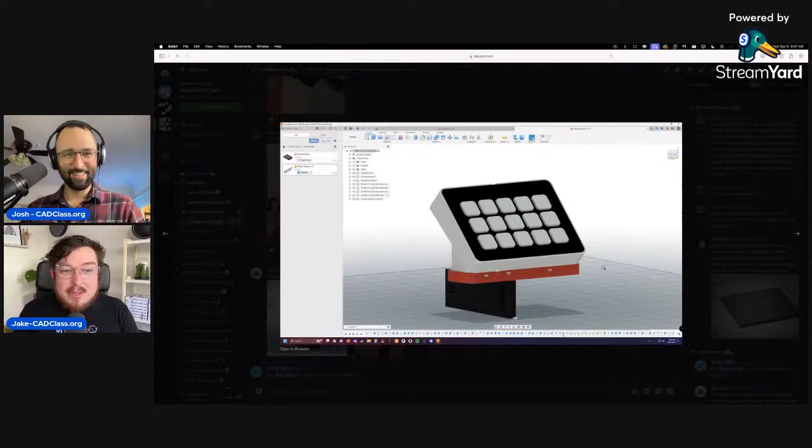Wookie-O, or Wookie Ohio, has made this really kick-ass project - a Stream Deck. That looks like a steering wheel for a game. I have a non-standard wheel stand for my sim racing wheel, and I had to make something to keep my Steam Deck nearby, here's what I did. That is absolutely rad, making this little custom thing. I've seen people use or make these for CAD, where it goes to an Arduino or Raspberry Pi, so you can pre-program buttons and make custom stickers for them.

So like a very specific thing or a complicated series of things that you would normally have to click and drag, and this is just a single button. Like that's awesome. That is so rad. So this is absolutely kick-ass. Love this stuff.

Love it. Love it. I had another conversation with the city of Sacramento yesterday. So we won the innovation grant here in Sacramento. And I was sitting down and she said, "Hey, so what's the desired outcome? What are you measuring? What are the metrics?" And I was like, "Look, I'm going to put it as simply as I can for you. People who go through our program, they can do as much or as little as they want, but the moment they start making things that they're genuinely excited to make, and it's not our stuff, but it's stuff for them, that's a win. That's it."

Yeah. That's all I want. If they leave 100% excited to make their own stuff, that is the goal of the program." And she was like, "Oh, yeah. So what about the metrics?" And I'm like, "That is the metric. That's a win."

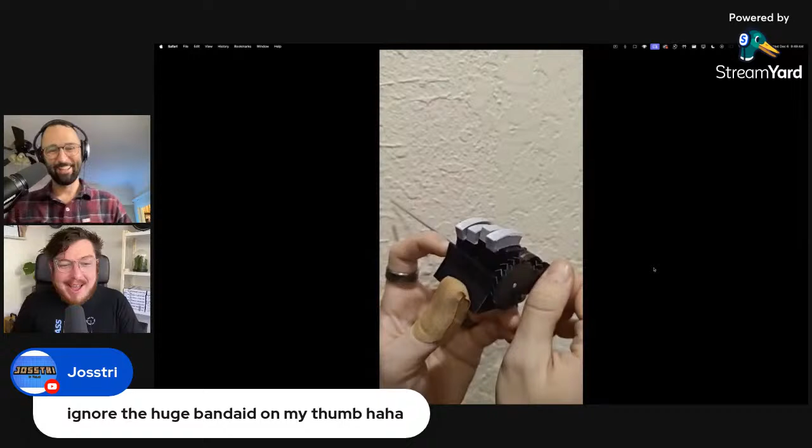And that's Josstri. So he's in the chat. So if you've got questions for him, by the way, he's there. Josstri, yeah, I still need to pick your brain. He said, ignore the Band-Aid. Yeah, I'm not going to ignore that Band-Aid because that is the mark of somebody that's making things. I don't know of many makers who aren't just full of Band-Aids and splinters.

Yeah. And I have a tiny story. So my fiance is a nursing major, but when she was in high school, she was the person at football games, the medical staff that ran over and helped you off, wrapped your ankle, all that kind of stuff. So her entire life she's been very tuned into, I need to help people. Oh, you cut yourself, broke a bone, I'm here to help. And anytime that I was doing woodworking or metalworking or welding, and I would cut open my hand, slash open a finger, my initial reaction is, oh, just squeeze it and squirt some super glue on it and hold it for a few seconds, then it's fine, it's done.

Because super glue is hygienic. And she had never heard of this before. Uh-huh. They use it in emergency rooms, by the way. Yeah. But I learned that from my grandpa in his workshop. And she was like, what kind of backstreet alley medical aid is that? And I'm like, looks fine. She's like, no, it doesn't. PC Van Vliet says, thought it was to prevent you from sucking your thumb. Boom. I don't know. It works fine. It works just fine. But anyway.

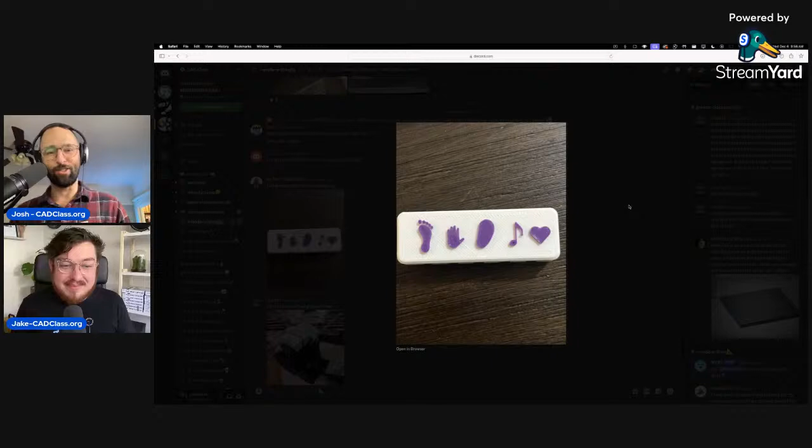We went through the process of, I think there was like a friends don't let friends try to modify STLs rant, maybe PC Van Vliet. I don't remember who it was, or maybe it was Maple Leaf Makers. I don't remember who, but we went through the process of importing that, starting to kind of edit some of the STL, and just saying, actually, the way we do this is just to redo it. Yep, it sucks, but that's usually how it goes.

Fantastic. So it looks like he did it. That's amazing, by the way. I mean, Maple Leaf Makers is there. So I think he's only completed maybe week 0 of what we have in the book so far, and he's already making his own custom stuff. So you guys who haven't yet done any of that, you can do it.

Also, shout out to Fancy Frog. What a name. Fancy Frog. I love it. Cool. Absolutely rad.

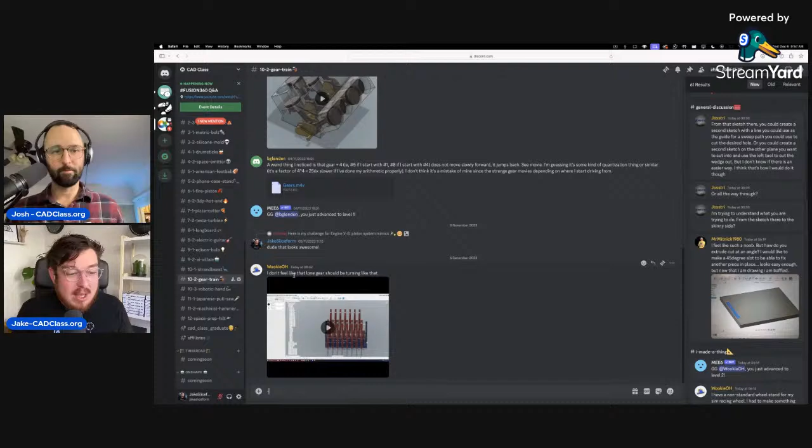A really quick question in the gear train, which is much later in the course. So the whole point of the gear train project, if you guys haven't gotten to it, is that you essentially make this massive gear reduction system where if you put in enough speed for the first gear right here with just a normal hobby motor, it reduces that slowly but surely until the very last gear will take a year to make a full revolution. And it's in this kind of tight package.

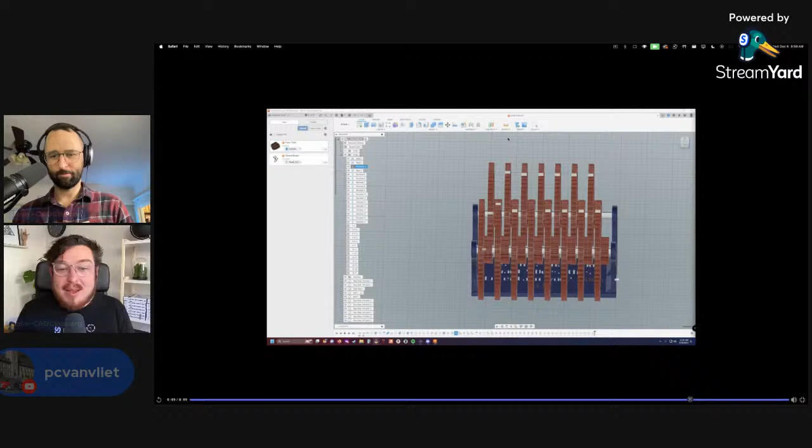But there's like 17 joints you have to do exactly in order and exactly motion link all of them. It's a massive pain. We'll be keeping the project, but remixing it to make everyone's life just a little bit nicer. Just simpler. If you want to expand it, you can. Yeah. So we'll just be messing around with this a little bit, because there are some really fun bits of physics in here, which I kind of dig. There's a little bit of math in there, which I like, but not everyone does.

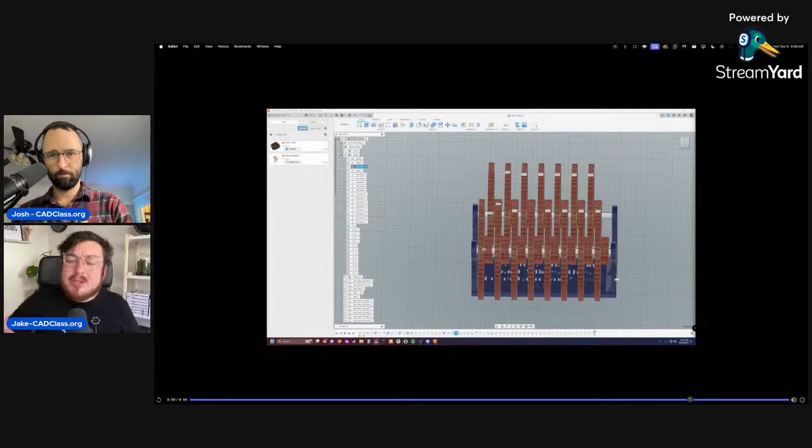But this person's problem, not sure who it is. So as you can see, when they apply an animation to the first gear, it looks like everything's turning fine, but this last gear is kind of funky. This is mirroring the motion of the first one. So I think they just accidentally added on a motion link between this gear and the first one, potentially, and set it to a 1-to-1. So when you turn the first gear at a set speed, the other one is going at the exact same speed. It's a 1-to-1 ratio.

But for all the other ones, if you guys can see, this one is a 1-to-4. So when this first one turns 1 revolution per second, this one's turning a quarter. That one's a 16. What is it? 1-to-64. And then it just goes on and on, reducing until this last one will look like it's absolutely not moving at all.

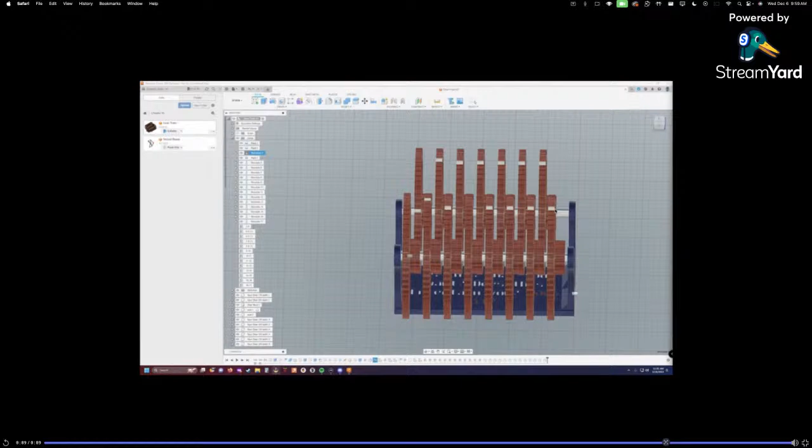I actually do have a little motor, teeny tiny little hobby motor. Nice. That I've been meaning to 3D print this and actually make it. Yeah, I have the files. I just need to make it. But that's a mini project coming down the way in a little bit.

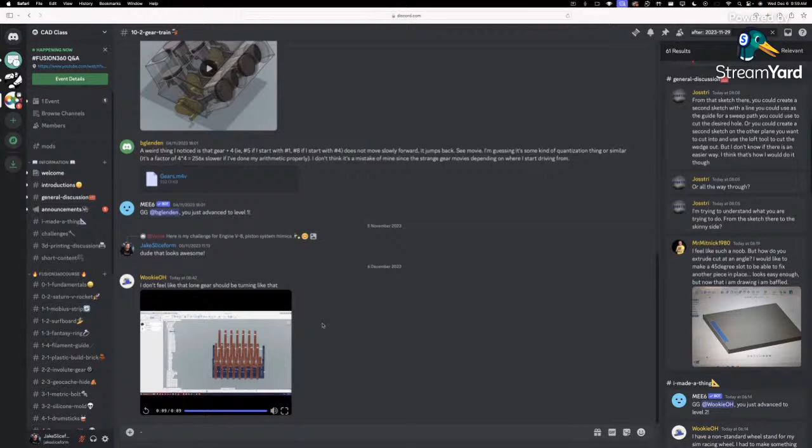We got to meet him at Open Sauce in San Francisco and interview him. Yeah. Such a nice guy. He was super nice. Rad. Yeah. I love his stuff. He's an artist. And I just envy his work. I agree with you. Yep, he's amazing.

We had a really funky question from Mr. Mitnick, which I think he's in the PC Van Vliet. Is Mr. Mitnick? They are one and the same. Gotcha. So he says, I feel like a noob, but how do you extrude cut at an angle? I would like to make a 45-degree slot to be able to fix another piece in place. This looks easy, but now that I'm drawing it, I am baffled.

So what I think is that you essentially want this top surface to be square, but then actually like a 45-degree angle V cut into it.

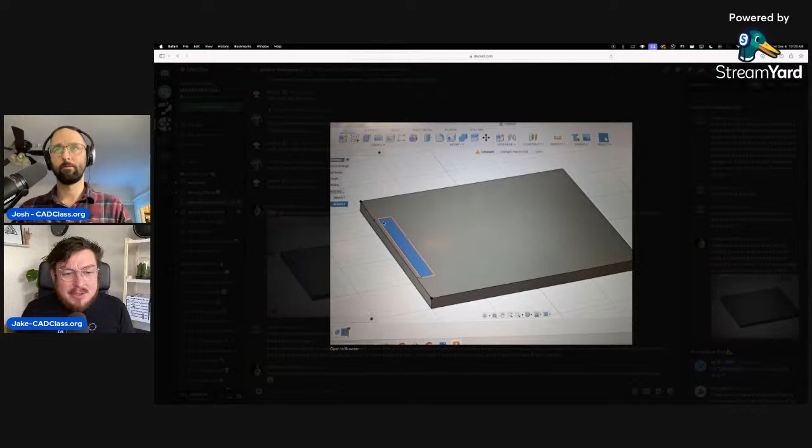There's a couple different ways to do it. It looks like you made a sketch for the rectangle, extruded it, and then made another square here. I would do it in a slightly different way, and I'll just do it very, very quickly if you don't mind. So my initial reaction is to make a box. I'll just make it roughly the right size.

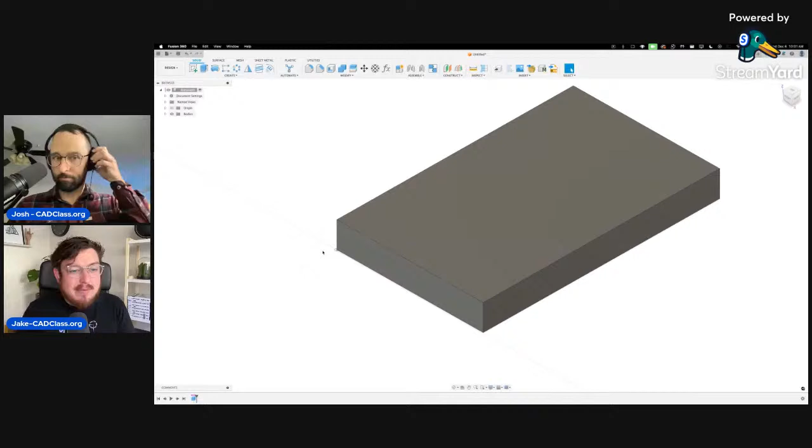Yep. And then you were drawing a square on top, and I think Jostri in the comments said, "Oh, you should extrude it downwards, but then with a taper that goes to 45 degrees." You can do that, but you don't get a huge amount of maneuverability, a lot of customization. So instead of actually making a cutout from the top down, I'm going to do a symmetric extrusion cut on either side.

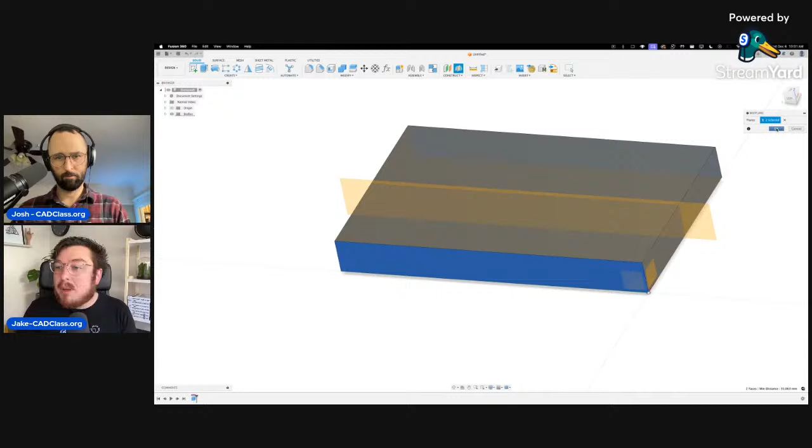You'll see you have a little bit more usability in it. But I'm going to do a symmetric cut, which means I need a plane running down the middle. You can see the origin is on this corner. So I'm going to use the mid-plane tool. I'm going to be selecting either side of this box. That'll put a plane smack bang in the middle. I can make a sketch on that plane. You can see the sketch plane is actually running through the middle of it.

I'm going to project this top edge just so I have something to click on. Then I can make my 45-degree angle lines. Add on some equal constraints. We'll make this perpendicular. And then you can make this any size you want. So if you know the depth, if you say it has to be 5 millimeters deep, or I think he said another part is actually going to be cutting into it a little bit. Yeah, so he's got a little comment here.

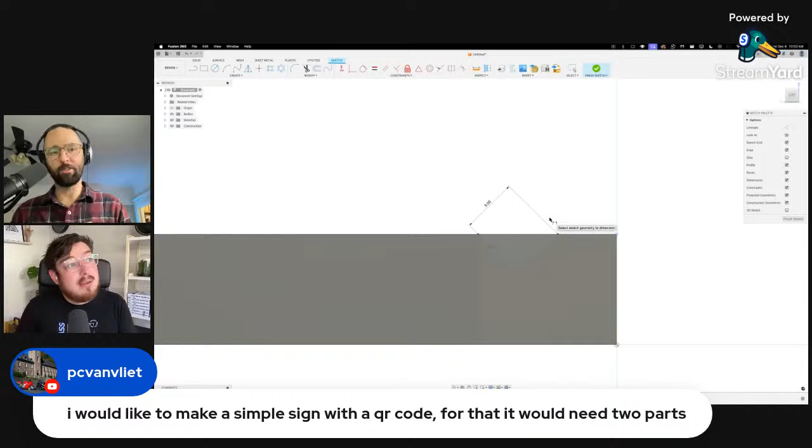He said, I would like to make a simple sign with a QR code. For that, it would need 2 parts. I don't entirely know, but I think keep going through this process because I actually think this is still the answer. And then you'll let us know, PC Van Vliet, if that's true.

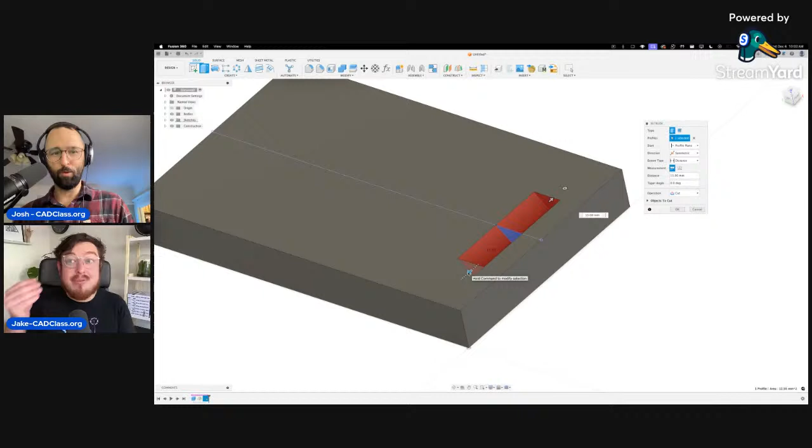So as soon as I'm done with that sketch, then I can extrude it because there is only one profile. It has said one selected profile. I can make the direction to be symmetric. And because I'm actually extruding this into a volume that already exists, it's going to be cutting immediately. Yeah. So in the other scenario, I'll actually do it on this side, just so you guys can see the differences.

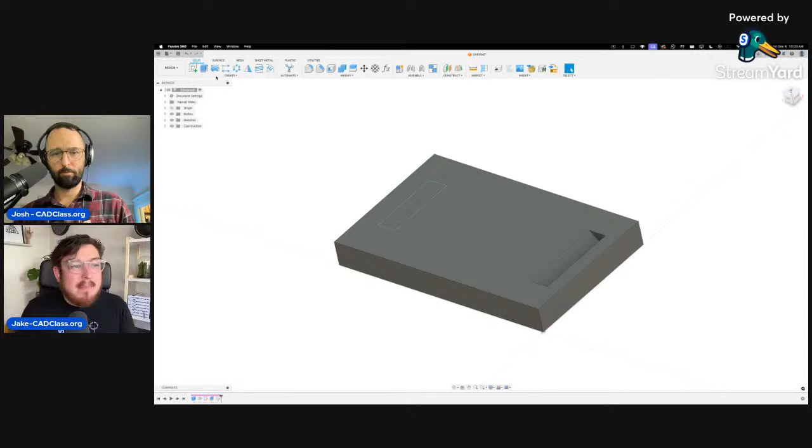Generally, when it's a simple operation like this, the more dimensions that you have access to, the easier it is, especially with angles. Angles can be kind of a pain to deal with. But as you'll see, if I try to extrude this downwards and then add on some angles to this, like a trapezoid, it's actually a little hard to dial in exactly what is perfectly cut in.

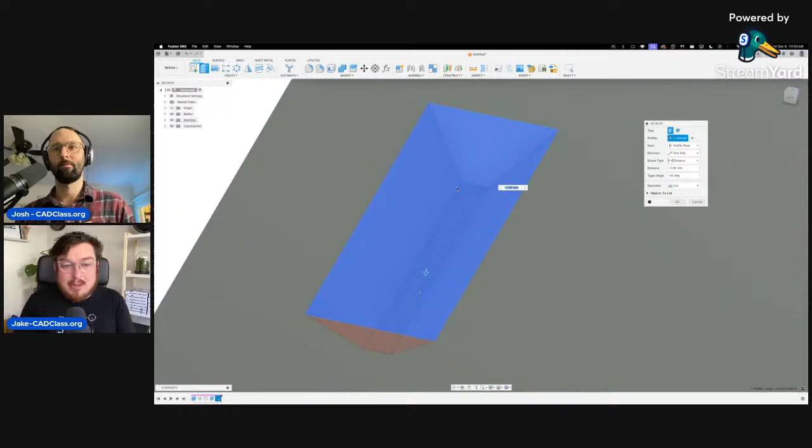You can see I can set this to negative 45 degrees, but then I've got this kind of flat plane in the middle, and doing the math to make sure that it's a nice tight corner on that can be a little tricky. And I don't know if you guys can see this. You've now got slanted walls on the left and right, so you don't get those nice, neat straight lines on either side. So, 2 different ways to get almost the same result, but I would prefer that one. What do you think, Josh?

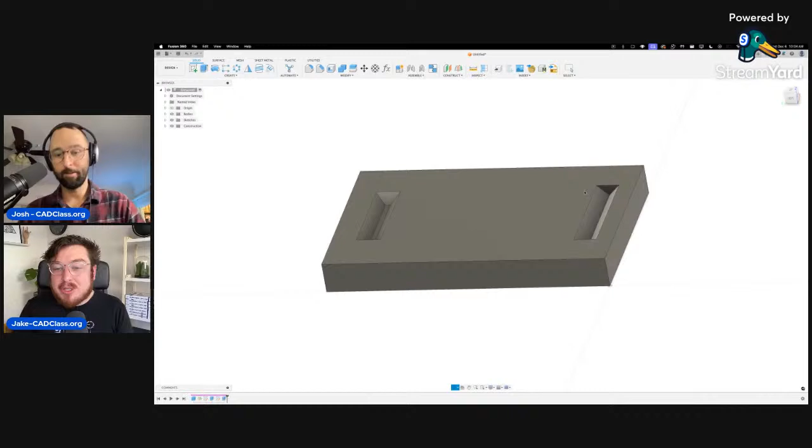So sorry. As you were, I was not paying attention to the second operation. So this is the first way where we essentially made a sketch of a triangle and then symmetrically extruded it either way. And then this is the way that Jostri recommended, where you actually drew a square. If I open that back up, start off with a square and then extrude it into the body with a 45-degree angle.

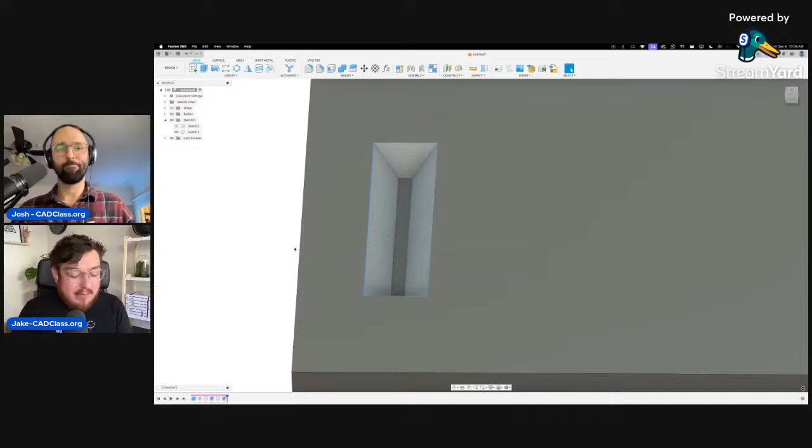And the problem with that is that often you don't have a ton of control with this flat section in the middle. Interesting. Yeah. You have to do a little bit of reverse math, which can be kind of a pain. And then you also have angled walls on the left and right, which you usually don't want. It's a little bit more complicated than you need. And on my method, you just have flat edges.

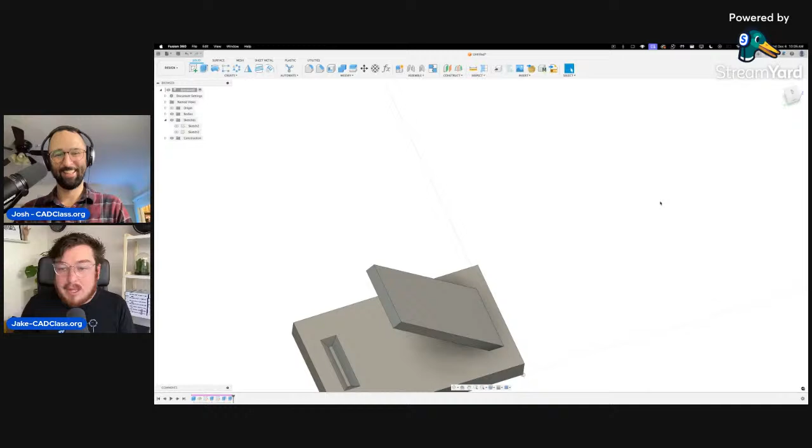So if you need to have like a square piece that slots into that just fine. For example, if you have like a little different body, duplicate. Let's change the color of that. Lovely. Boom. So if you have another piece that's actually slotting into it, then that just makes it a little bit cleaner, a little bit easier to deal with. But yeah, lots of different ways that you can do this.

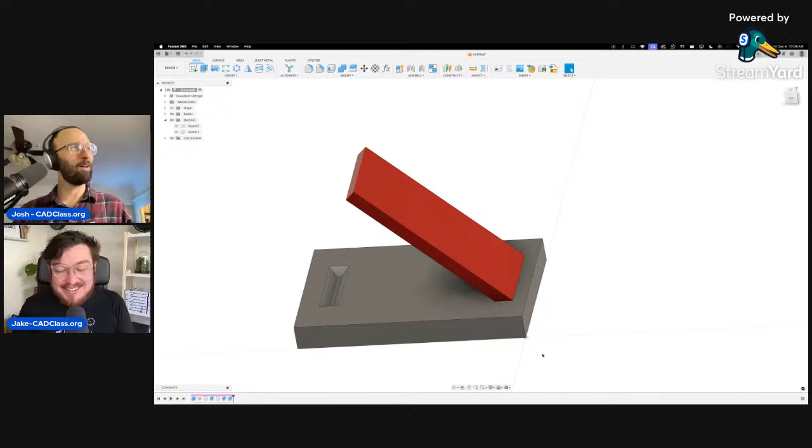More than one way to skin a cat, etc., etc. Oh my god, I hate that saying so much. Oh, we need to come up with like positive, like for some reason I don't even know what the name of that is. What is that called? Anyways, PC Van Vliet says, ignore me. PC Van Vliet says, thanks, Jake.

Gold nugget. Yeah, it makes a lot more sense. Yeah. And I like getting used to using that plane tool where it just automatically bisects the body. Mid plane is really nice. It's so rad. I highly recommend.

There are multiple ways to peel a potato. Not really. There's not that many ways to peel. I mean, I can't think of that many ways to skin a cat, but there's only a few ways to peel a potato, surely. I think it's probably pretty similar.

Anyway, regardless, you got a lot of those tools in the construct menu, there's a ton of them. The vast majority I do not use, but there's a couple in there that are absolutely essential. One of them is mid plane, offset plane, and then like axis running through cylinder or whatever. Highly critical. Absolutely do that.

All right. I have a project, and I did a prototype last night, and it wasn't a failure, but it got me closer to realizing what I actually want to do with the project. So I'm recording a bunch of data, some really, really huge files. And I have quite a few of these little Samsung T7 SSDs. This is a 2 terabyte drive. It's about the size of a credit card. 2 terabytes for like $100. Crazy. And these things are really rad.

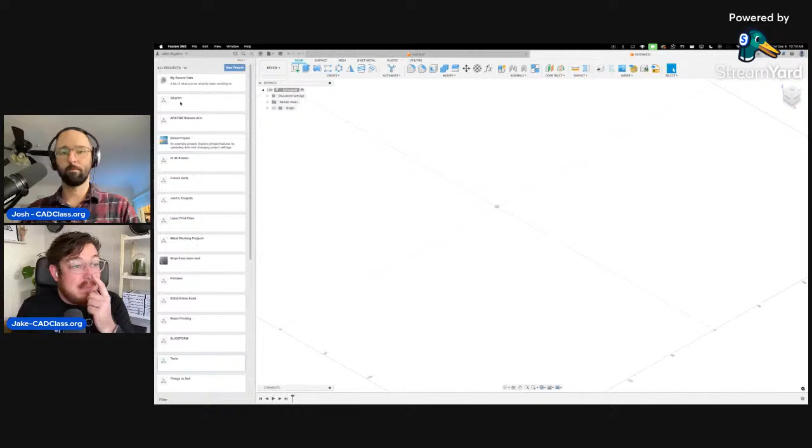That's fine. So I've got a few design elements that I just want to put into place. So I'm just going to be messing around, really. But I figure this would be a good mini project to show off. All right. So let's make a new tab. Oh, no, that's a lie. I actually did build this last night, so I can go in and edit it. Oh, where is this? It's disappeared. I'm not sure where this is. There we go. Okay. So this is not a tremendously exciting build.

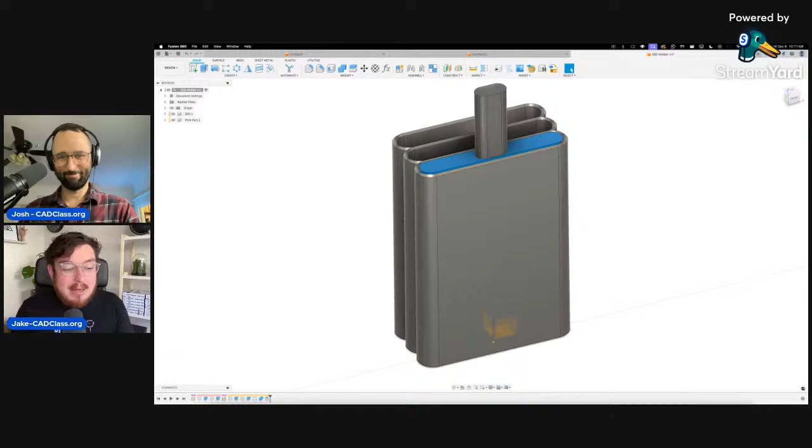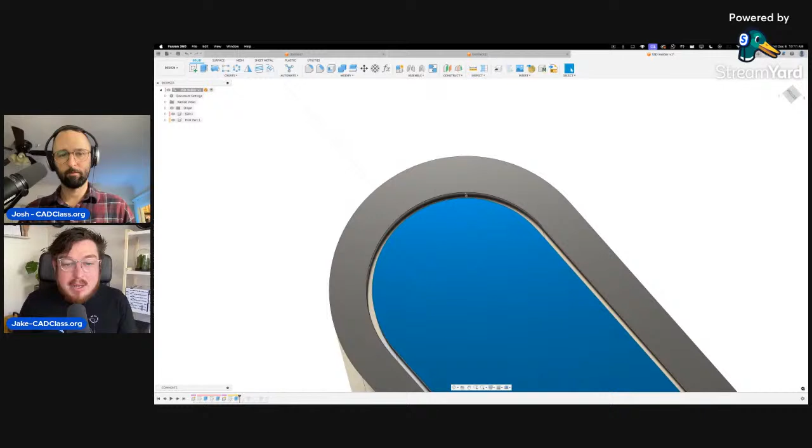As you can see down in my timeline, it doesn't actually take all that long to make. I made a little SSD down here with a USB cable coming out of the top, just so I have a rough idea for the size. Making a new body that goes around it. But as you can see, I did add in that little bit of clearance in it. So I want to tighten that up just a little bit, but I also want to show you guys a weird thing that goes on with this.

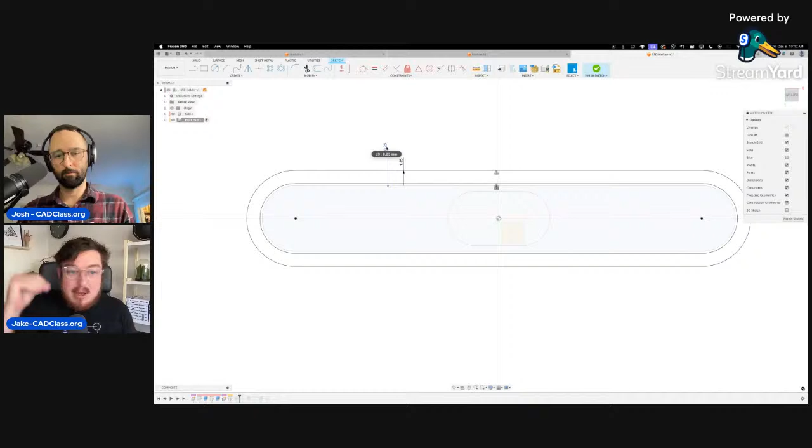So this inner slot shape right here, that is the head-on profile of these little SSDs. And so I essentially want to make this outer profile right here. So I need to have the outer edge, and then obviously the inner side with 0.25. That would be 0.5 for the top and the bottom for the clearance. Okay. So that's pretty easy. You could go into the offset tool. You'd select the profile that you want to work with, and then you can type in 0.25, and that gives you this inner wall right here.

The weird thing in Fusion, I'm not 100% sure why, but you cannot offset an offset. So as soon as I try and click this, it'll give me an error that says it already has an offset, which is always kind of funky. So if you want to have an inner and an outer wall where they're both offsets, you actually have to do a little bit of math where you say, all right, I want this dimension, and then however thick you want it. So having 0.25, I don't actually need it that thick.

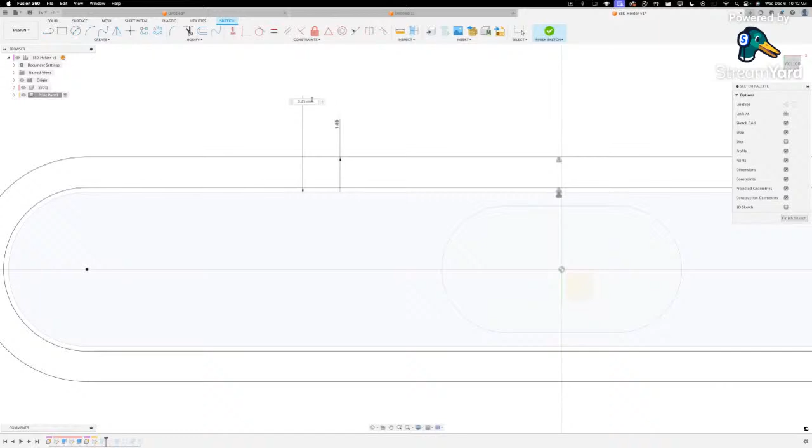We'll go 0.15. And then as far as the math here, I can actually click this dimension, which will pull up the parametrically driven parameter. So if I ever need to go back and change that, the other one will be updated automatically. And then instead of 4 layers, I'm going to do 3. So 1.2.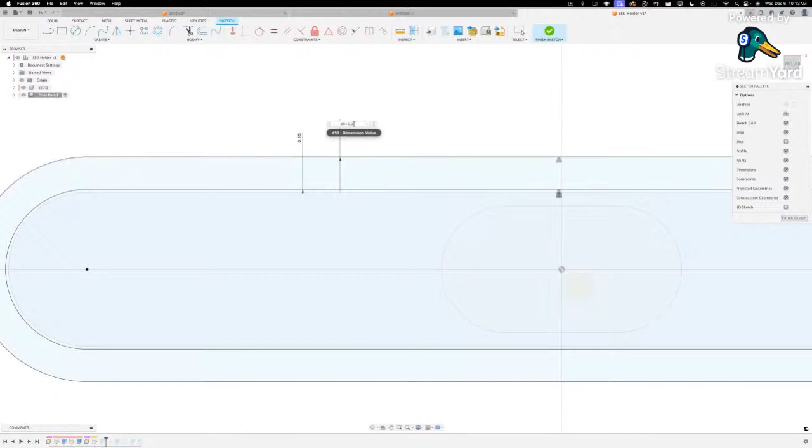By the way, as you're designing this, this design is for 3D printing. And some of the feedback we've gotten is you want more information about how to design specifically for 3D printing. So the next iteration of our book is definitely going to have some of that dialed in, thinking about the wall thicknesses that you're talking about now, Jake. So definitely coming down the line. So stay tuned for that.

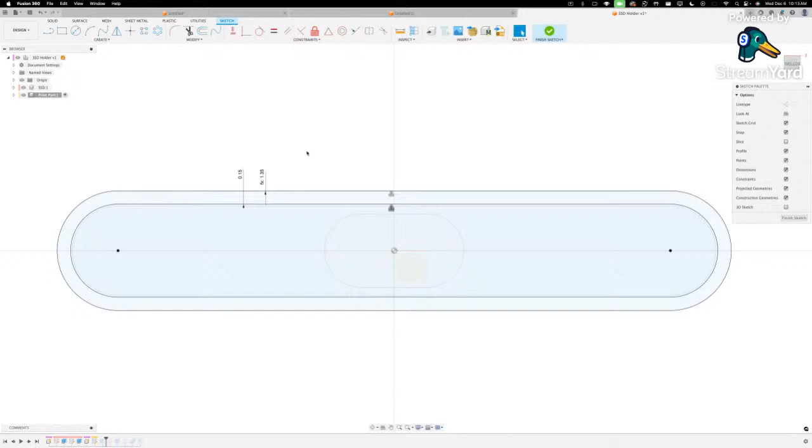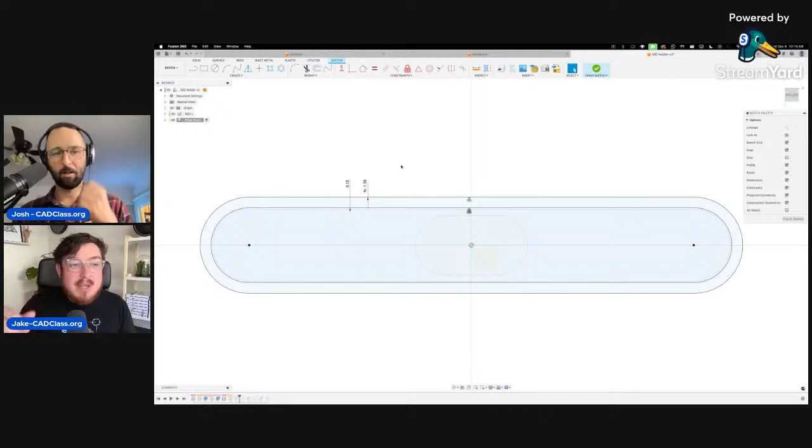Yeah, absolutely. A really funky total tangent really quick. 3D printing nozzles are 0.4 millimeters because some guy just decided. I think the story is that the person that decided that just had that drill bit closest to him, so he used it, and that became the standard for the industry, which is so silly. And so it used to be that if you wanted to make a wall thickness, you'd do multiples of double your nozzle diameter. So you'd make walls that are 0.8, 1.6, 2.4, 3.2, etc.

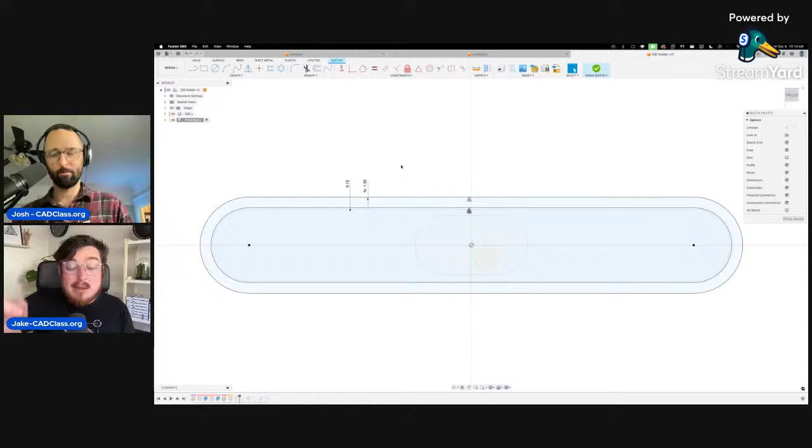The problem was that if you had an odd number, if you had 1.2, it wouldn't actually draw the line in the middle. You would just have a layer, an air gap in the middle, and then another layer, and it would be really, really weak. But now we have programs that fill in the middle. Don't know why that was ever a problem, but yeah, 1.2 is now an acceptable value, which is so stupid.

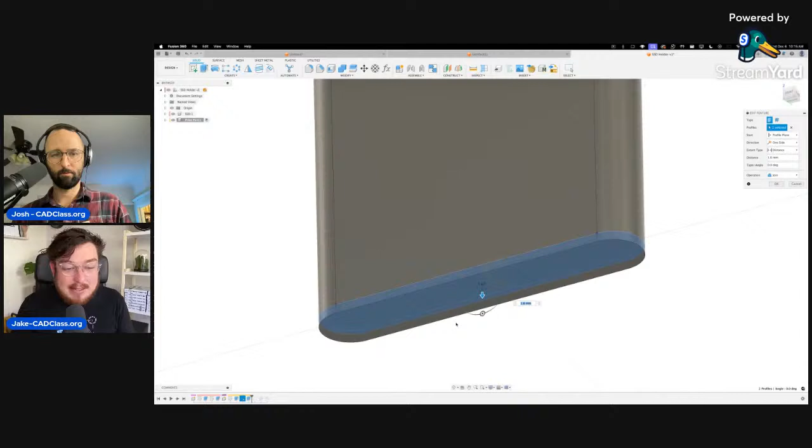This is essentially just extruded up to that top surface. Capping off the bottom a little bit by extruding that down, I put it at 1.6, but that's a little unnecessary to make it so thick, so I'll go back down to 1.2 so everything is nice and even.

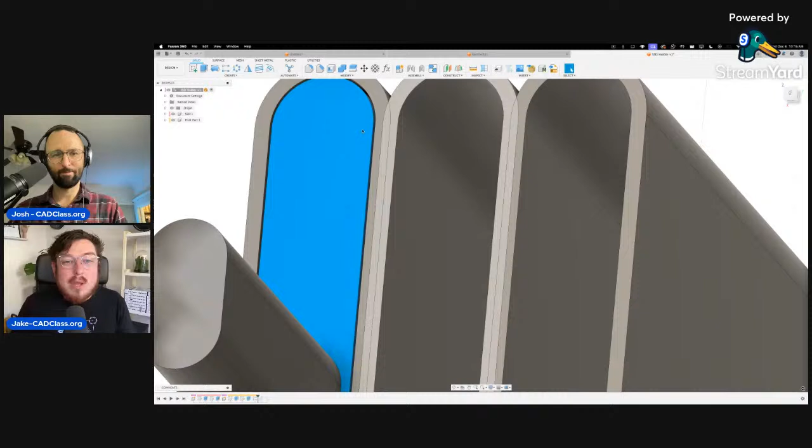Then I wanted to add the clip in now, but really quick - I essentially patterned them all the way down, but because I changed the thickness of my material, you can now see I've got a little bit of a weird overlap. So I'm just going to fix that and undo it really quick, because I want them to share the same wall line right here.

The dimension I actually want is to measure that wall to that wall - that looks like it's 9.59. So when I go into my rectangular pattern, I go 9.59, and as you can see, they now share this inner wall right here. So I don't have double thickness because they're right next to each other. This saves a little bit of material and actually makes it stronger, which is much nicer to deal with.

And then I just combine them all together and added on a little fillet onto the top - 0.6 just to halve it. There we go, so now it's just a little bit easier to put the SSDs in there.

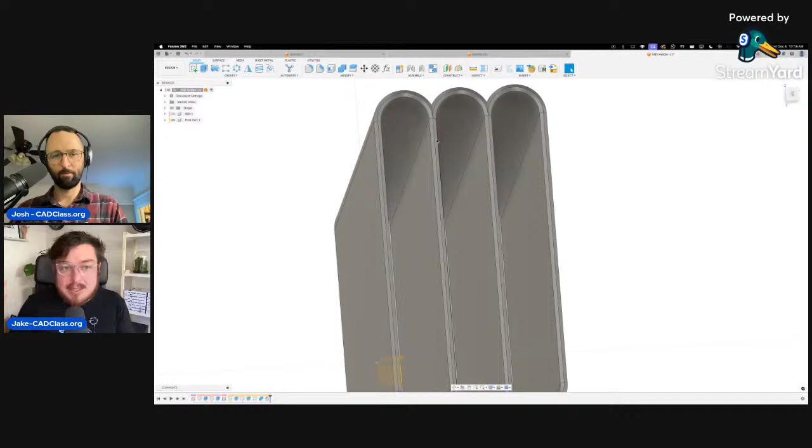But I wanted to add in that little pin slot, which is a little funky and hard to make, but I think it's a good project to do. The idea is you want just a little tooth, basically like a 45-degree angle, with cutouts on either side, so it has a little bit of movability, a little bit of a springing action.

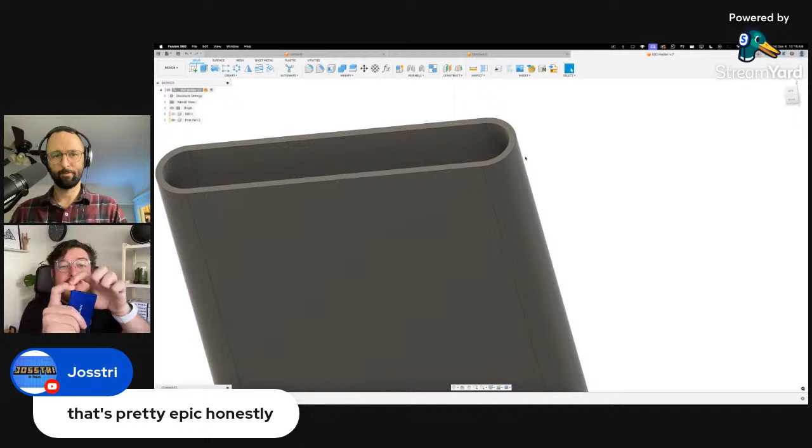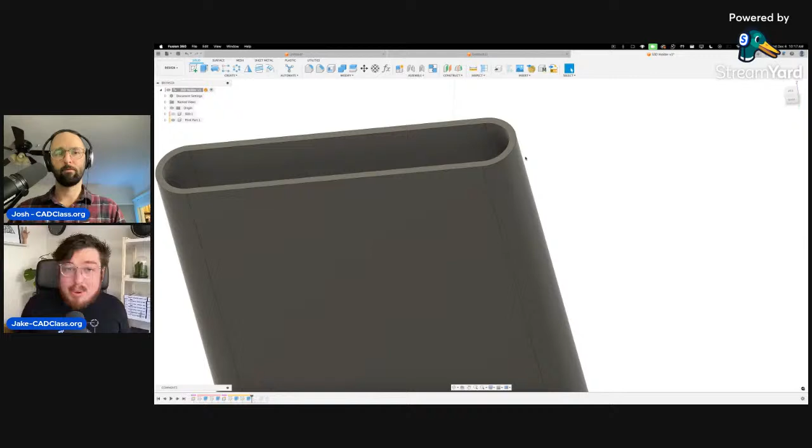So it can snap onto that, and as soon as you push this tooth back, you can then pull it out. In this scenario, because we're printing in this orientation, that tooth actually has to be a little bit wider, because the cross-sectional surface area of that layer line is tiny and it wants to break off. In normal plastic manufacturing, where it's all a uniform amalgam of material, there are no layer lines - it's evenly strong everywhere in every direction. But with 3D printing, we have to change how we design things just a little bit differently.

So first off, I'll make the tooth and then make the cutouts as a secondary step. For this cutout, I can't make a normal straight tooth because this profile is on an angle, so I actually need to use a sweeping operation, which means I need to make the triangular profile of that tooth and then sweep it around.

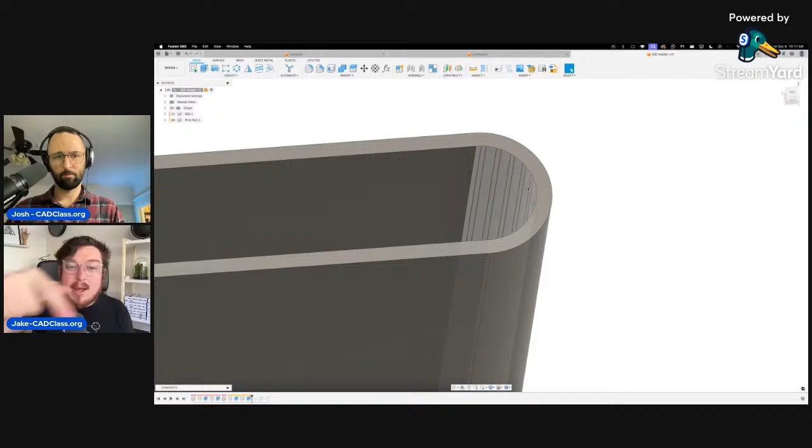So I'm going to make a new sketch and try to get an inside view. There we go - actually, that won't let me click it, so let's turn that off, click the plane I want, and then turn it back on. There we go, so I'm going to be projecting the inside of that surface.

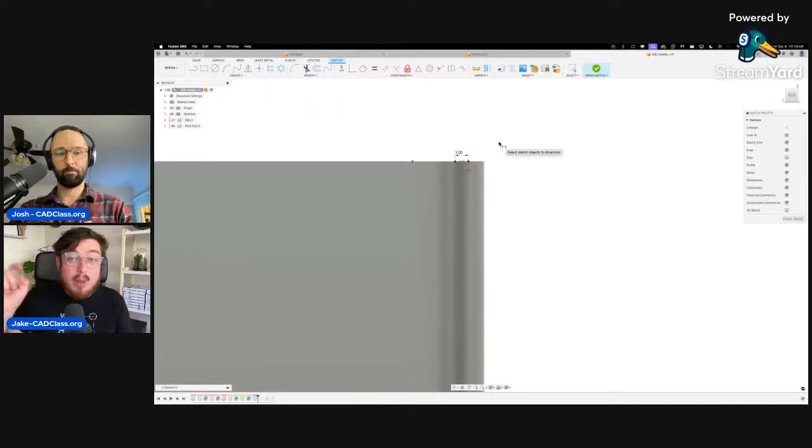Getting a head-on view, I'm just going to make a very simple triangle. I actually want to make this fairly small, because if I make it too large, it's going to build up too much stress in the print and it'll likely fail. So I'll make this, what, 1 millimeter? That sounds about right - it doesn't need to be too strong, just large enough to kind of grab onto the end of it. That's fine.

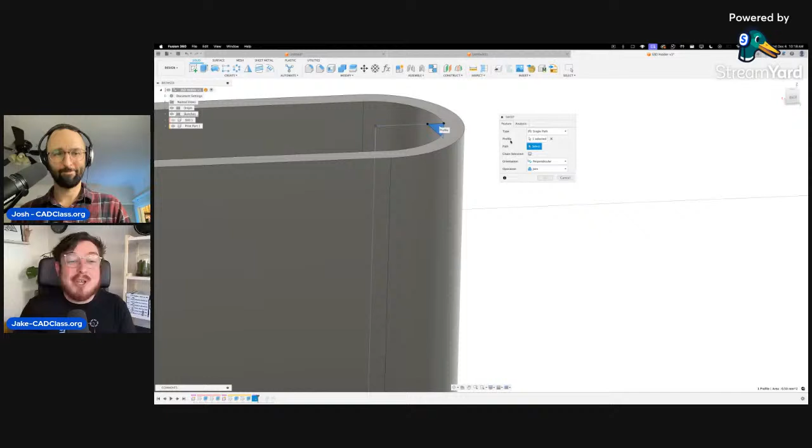Then I can take this profile and sweep it. With sweeps, it's always asking what is the profile and what is the path. The profile is this little triangle, and the path is going to be this entire edge. But I don't need a chain selection - chain selection means that if this curve is tangent to this line, it will continue on. By unselecting that and just clicking on this edge, it only wraps around to where it's needed.

I don't need it to be the entire length, though, so I can actually drag these arrows in a little bit as well, and as you can see with this number, it ends at 1.0. So it's essentially like a percentage almost, not a distance. And then there's this type as well - yep, don't need to worry about that.

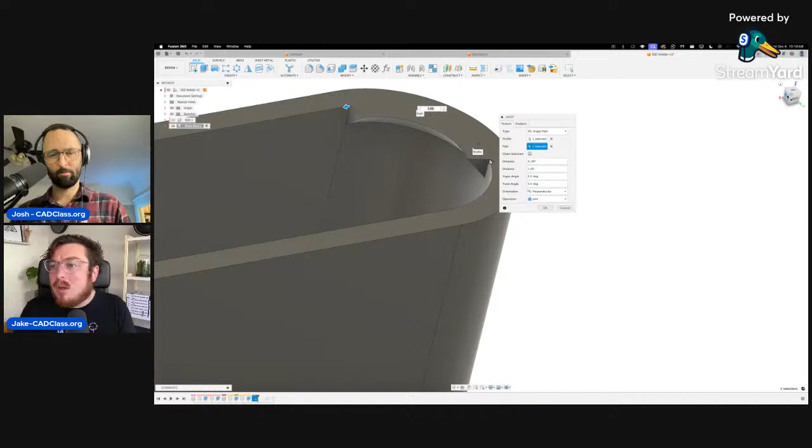So a lot of manufacturing, you actually just kind of eyeball things and go, yeah, that's about right, which is always freaky for people. They go, is this how things are made? It's like, yeah, this is how things are made. I can't tell you how many times I'm designing something pretty critical and I'll just hold up a pair of calipers to me and go, yeah, that's about right.

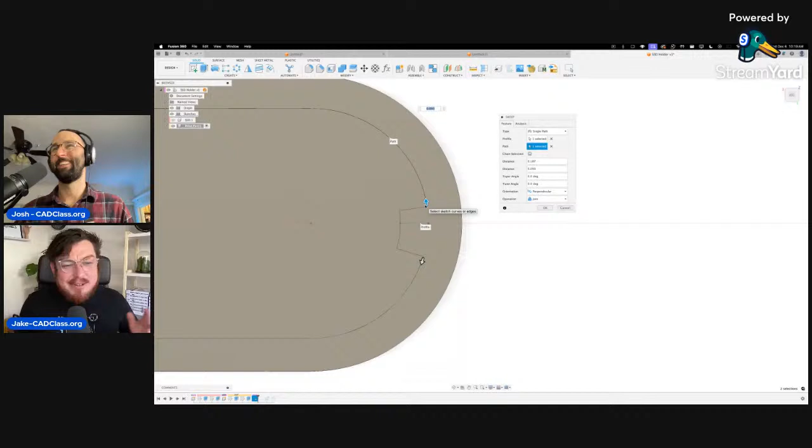Type it in, run a simulation, and go, oh, it works, great. Yeah, that's how things are made. That's how things go.

So I'll start off with 0.1. Because this is a percentage, I actually do not know the distance for this, so I can make this and then go back with my measure tool and just check how large it is. That is 1.3 millimeters. It's kind of small.

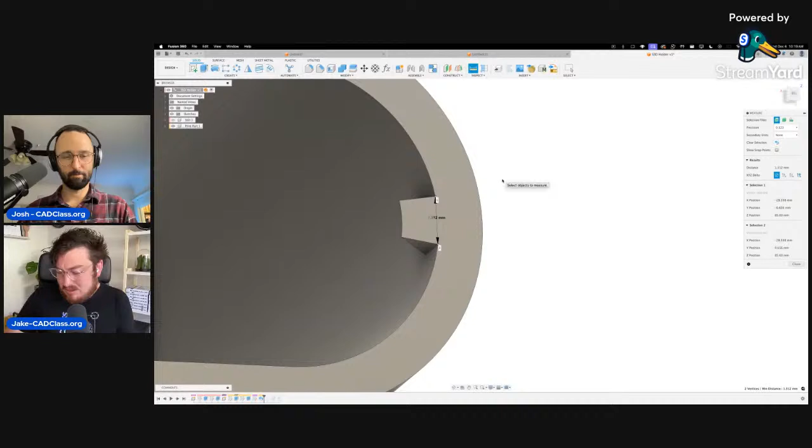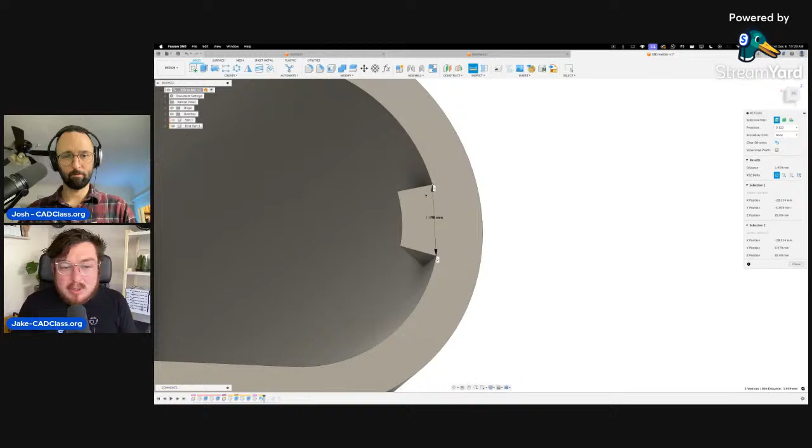Yeah, I could go a little bit more. Let's whack that up a little bit more. Let's go to 1.5, 1.5. So I've got... oops, did that not accept it? Yeah, 1.5 and 1.5, great. There we go, that was weird. What is the total with that? 1.9. Great, that's just fine.

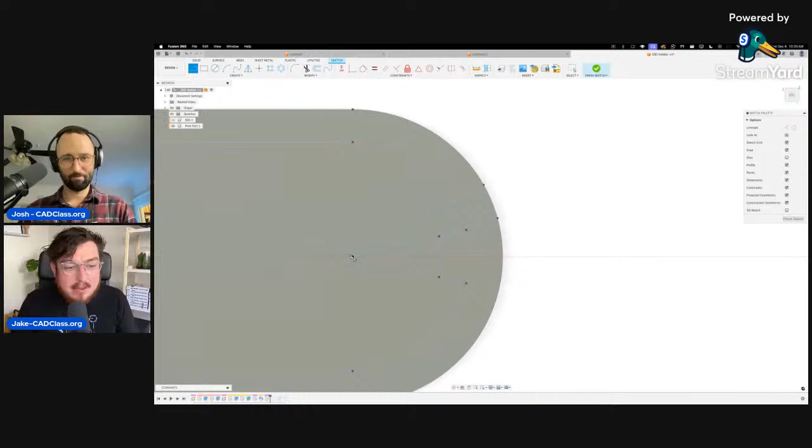And then I can go in and make a new sketch on this top plane. And this is where I can make just a very, very simple rectangular cut into this. Or actually, I'll make it a little bit fancy, I'll make it tangential cuts. So I'm going to be extending this out all the way. And the whole purpose of this, I'll make a little cross line as well.

So the whole purpose of this cutout is that it essentially just leaves me with this tooth being a long, skinny stalk. And because it has a lot of height, it means it can flex nice and neatly. So I'll make this a tangent operation. This gap right here, I'm going to essentially be cutting away this material. It doesn't need to be any dimension in specific, it just needs to be kind of loose. So 10 degrees to be cut out.

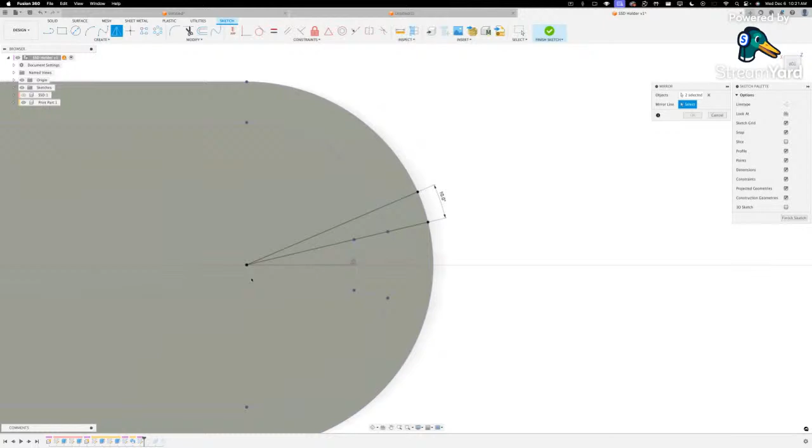That's completely fine. And then I can mirror these two lines across this point right there. It's a little bit less work. Then now I can go in with my extrude tool and cut away.

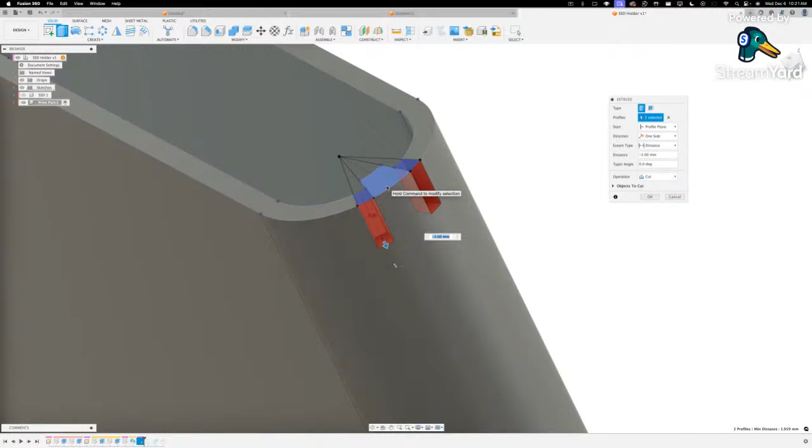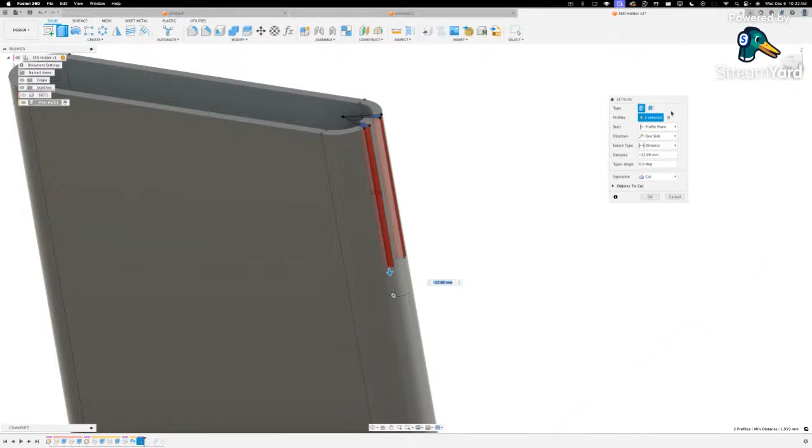And depending on how deep I cut into this tooth, is essentially proportional to the stiffness of this tooth. So if I only go down just a little bit, then it means this tooth really can't move all that much. That's going to be a big problem because that's going to be the first part that breaks. So if I go down, there is a certain point where it's stiff enough to where it will move out of the way and then flex back into place, but too low and it'll just break off because it's so floppy and so skinny. This is something in plastic engineering where they have huge textbooks with highly specific values on this. But because this is just a 3D printed part, we can just kind of say, yeah, it's about right.

That's fine. Something interesting here too is when you actually go to print this thing, when you actually go to make it, if I were testing this out and let's say I was not very confident that little bit right there was going to be as strong or as weak as the flexibility that I wanted, I would probably actually cut this in half and I would just print half. Yeah, absolutely. Going through the process of testing a feature, you don't have to 3D print the entire thing, just cut off a piece. I'll show you exactly how you can do that.

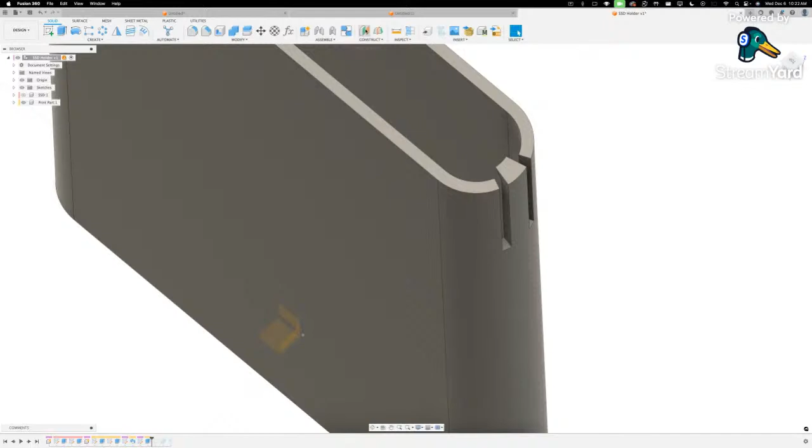Yeah, exactly. So you can make an offset plane from the top plane that goes up to that point right there, and we can split the body. I want to split it with that plane. Great. And then I can make an offset plane for the bottom, so it only brings up exactly what I need.

Yeah, and then we're just testing the mechanism. I use this all the time when I don't want to take 10 hours to figure something out, it's like I can figure this out in an hour.

So, love it. So now I've essentially got 3 bodies, I think. 3 bodies, yeah. I don't know if it cut, so I've got this low body right there, the main body, and then this is the only pin mechanism in it.

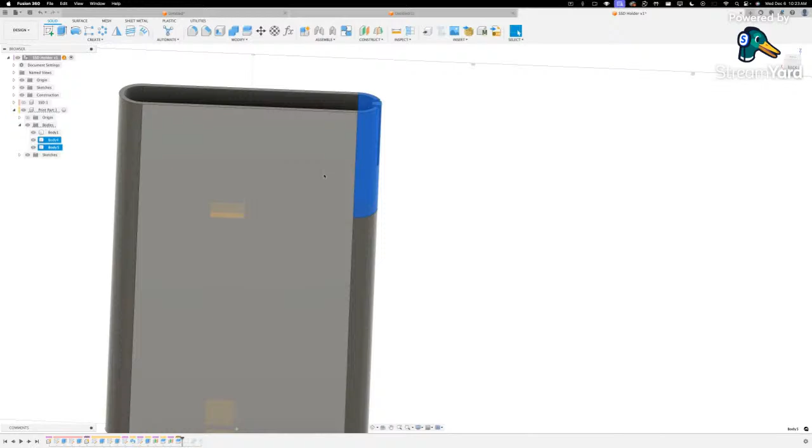So instead of printing this whole thing, I printed it at 0.16 millimeters for layer thickness, it took like 5 hours. I just printed it overnight, so I didn't really care. But this little pin mechanism, this may be something that I want to make today. So I don't want to print out all of this thing, waste a ton of time, waste a ton of plastic for this mechanism to just fail. So print out just this little thing and you can flex it and you'll know exactly.

It will actually fail. Yeah, or exactly. No, this is totally fine. Too loose, too tight, how does it feel? Yeah, you get a good sense of it.

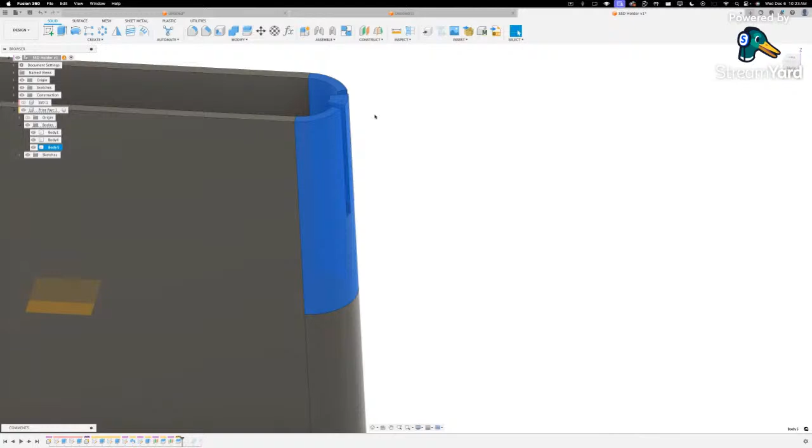So yep, definitely use those tools to cut your parts up. 100%, great little tip, Josh, by the way. Not bad, but I don't need these.

That's fine, so now we can go back into the rectangular pattern tool to actually make the rest of them. But I don't need 3 of them, I actually only need 2, so let's lower that quantity. Then these are now 2 bodies. Use the combine tool to join them together. Now we only have 1 body.

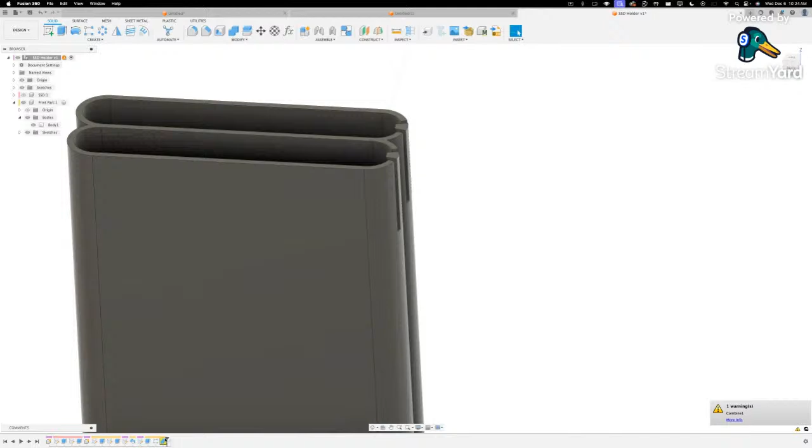And then just adding on a nice little fillet to this. I could add it to there.

Not necessary, really. Sam says, phone calls. This hour might get upgraded to a do not disturb hour. That's what I'm talking about. How much time do we have left? Oh okay, not that much.

I'm gonna do a very, very simple little explanation for some of you guys that are brand new to 3D printing.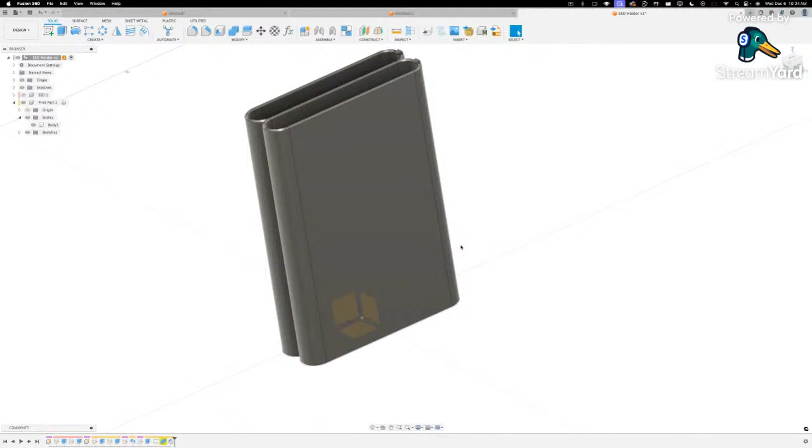I would be printing it up in this orientation where the flat section, with a lot of surface area, sticks to the build plate. See you, Jake, so let's— excuse me, oops that's me. Gross, okay, let's do that for a second. Can you see me now? I can only see my Fusion screen. I can see you now. Yeah, I'm just showing us on screen.

So I'm going to be printing it in this orientation where I've got a nice amount of surface area on the bottom that adheres to the build plate, and then I'd be printing it vertically. If I wanted to print it flat, I would have to support all of these shelves essentially, or else they would droop. So in this orientation, it prints much cleaner, much faster, no support material.

The other thing is that when you 3D print things, the first layer often squishes out. If you can see this, that's a little bit too blurry, but you get essentially a bulging out of the first few layers called elephant's foot, where pressure is being relieved. One way to overcome this is to add chamfers to the underside of a surface, right there. If you have this totally flat, it's more likely to bulge out. So adding in some chamfers essentially sucks or pulls away some of that material, so when you are extruding it too much, it'll kind of get filled into the void, so you don't get as much of that defect.

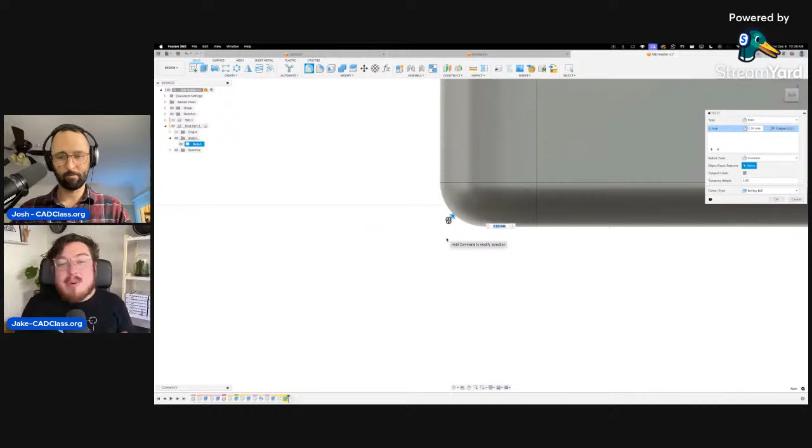What a lot of people want to do is put in a fillet. The problem is it does remove some material from this corner, or there is now a void, so that's good in that respect. But you essentially get this really intense overhang where you've now got a huge amount of droopage in there. So if I just do a very quick sketch, you'll see exactly what I mean.

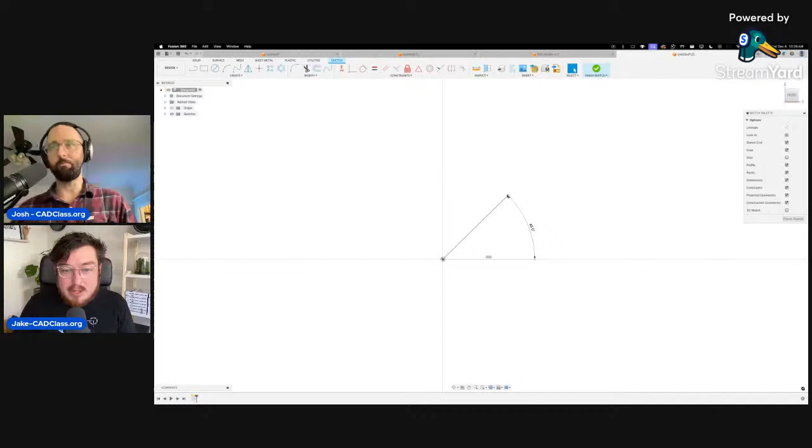If you are printing a 45-degree chamfer, this line is going off 45 degrees, and all 3D printers can print at 45 degrees, that's just kind of a standard. But if you try and print a completely perfect radius on there, you'll actually run into a few different problems. One is absolutely just going to be aesthetically, it'll look terrible. So I'll add a little 3-point arc—imagine that this is a radius.

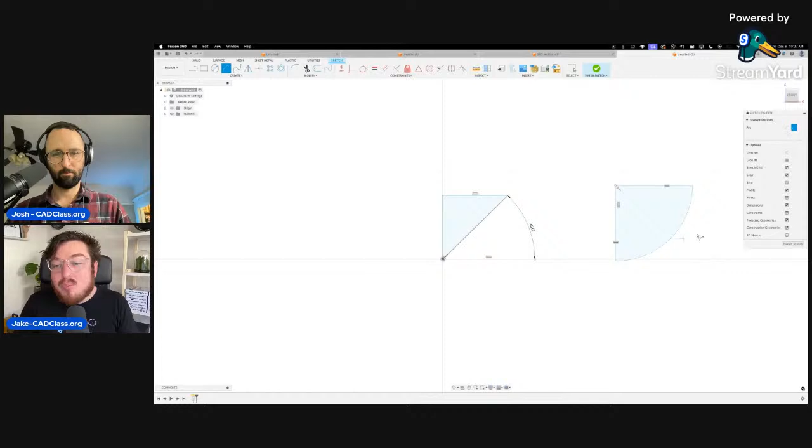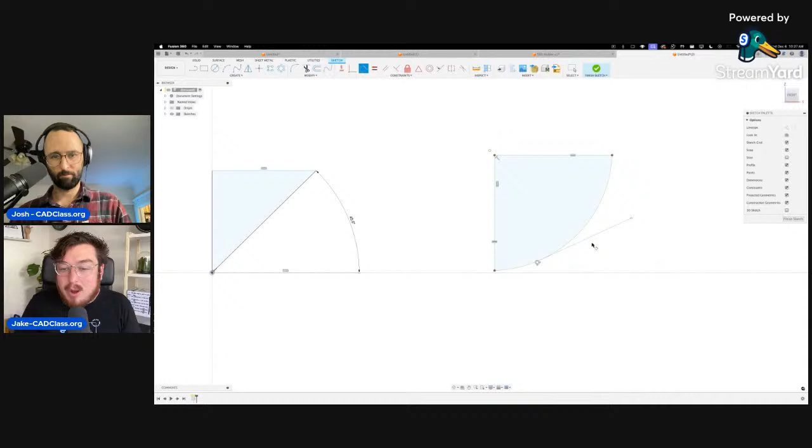The problem is for this one, there's no overhang issues, no droopage, because it can print that 45-degree angle all day long just fine. But with this, it actually starts off at essentially less than 90 degrees. So if I fix all of this, there we go, and then add on a tangent line just so you guys can visualize the overhang angle halfway up the print—it's intense, yeah, this is totally fine.

Maple Leaf Maker says, chamfer to 45, then fillet. It's interesting, yeah, you can do that.

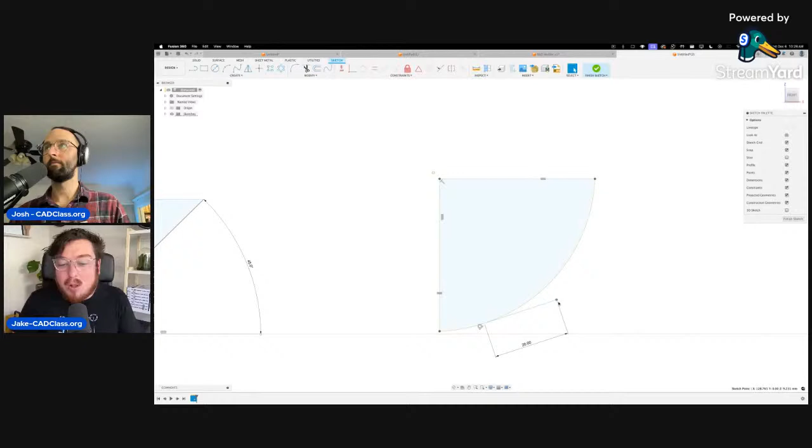Yeah, so later down the print, you're going off almost vertical, and this will print perfectly fine. But at the beginning of your print, you can see it starts out completely horizontal, and after a few layers, it's still at like 90 degrees. It will just give you this huge amount of droopage, huge amount of bad quality. So for the rest of your print, you can absolutely add fillets on there, they look really nice. But for the layer that's actually touching the build plate, make sure it's a chamfer—it'll make your life much easier.

Who said to make a chamfer and a fillet? Maple Leaf Makers—interesting. So if I add on a fillet to this top surface...

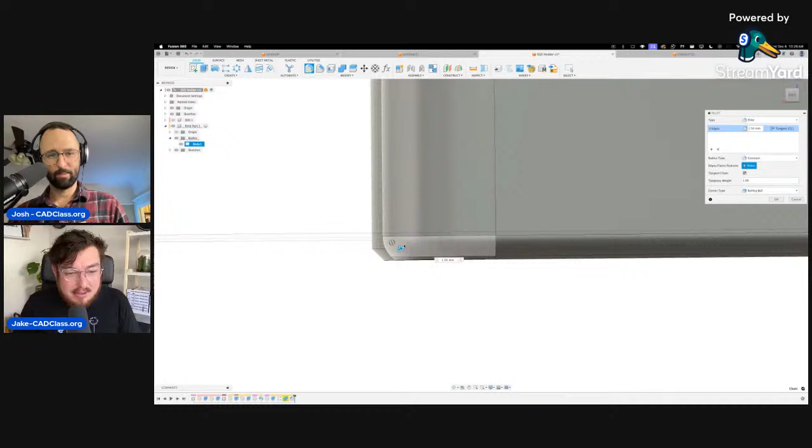So then that's interesting. I like that. Yeah. He says fillet the top edge now. Yeah. So. Yes. That's cool. All right. That's pretty good. That's pretty rad. Maple Leaf Makers with the tips and tricks.

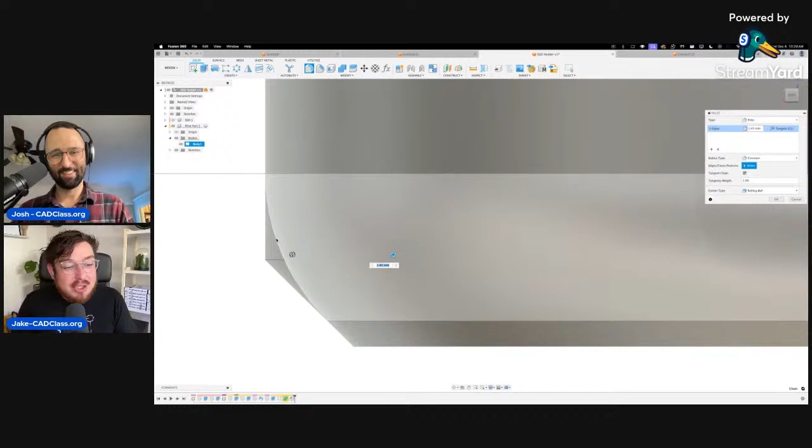I might make a YouTube short about that. That's actually a great trick. You can see it's actually removing more material than the chamfer right there, so you get a nice smooth edge. That's pretty cool. I will definitely be making a YouTube short about that, and I will totally be giving you a shout out for that. That's a great trick. That's really cool. We have one more for this quick tiny little edge. Not too big of a deal, but for the larger prints, definitely.

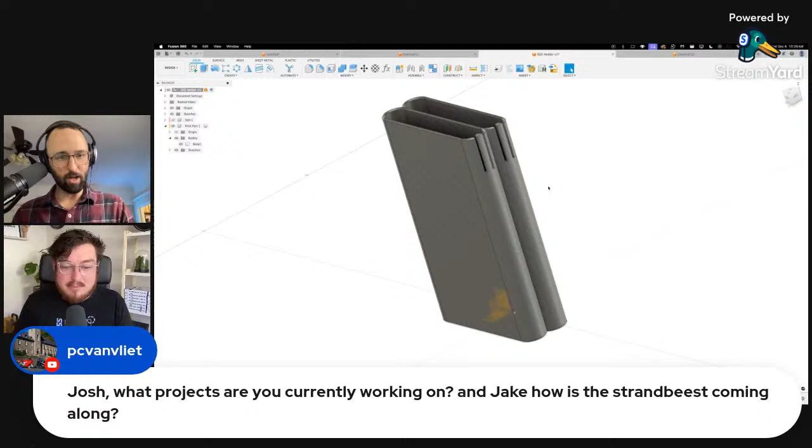You had another question? Or not a question. I think somebody had asked, what is it here? Josh, what project are you working on? And Jake, how's the Strandbeest coming along? So, as you all probably know by now, we're finalizing the second round of our 3D printing course. So 3D printing maintenance, calibration, kind of advanced techniques, assembly, better than the first intro to 3D one. Yeah, so we're finalizing that course right now.

And we are currently collaborating with two other course creators and authors to make a Tinkercad course and an Onshape course. And so to answer your question, PC Van Vliet, I am not working on anything personally except for how to build the next programs so that people can continue to make things on their own. So I've got my full help-other-people-make-things hat on right now, and I am not making much of anything. Jake, what about you?

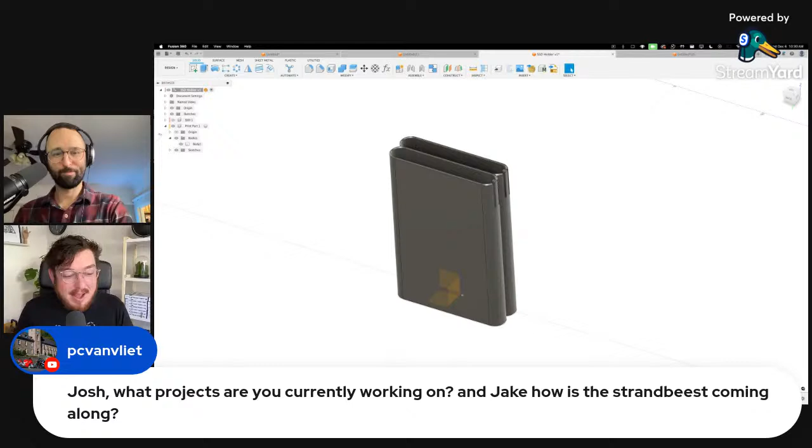I'm currently just doing a million things about editing, and so I'm just making some 3D prints that are representative. Some of you guys may like this. I have a few spools of metal powder filament, so copper particles suspended in PLA, so you can print it and you can oxidize it. And so I have a print that I have been patinaing or rusting for a day now. So let me just grab it. It's still in the early days, but I'm printing the Copper Bones key from the Goonies, one of my favorite movies as a kid.

This is really delicate. So the patina is kind of coming in really, really wild. So this was originally bright copper, like shiny buffed, kind of an orangey copper. We all know what it looks like. And it's just slowly turning into this really, really wild patina. Cool. I didn't sand it all that much. I might go back and sand it again, but it's just a hydrogen peroxide and vinegar and salt solution. And then you just sprinkle on some sea salt as nucleation points. And it starts to build up this really rad bluey greeny effect on that.

There's a YouTuber who does a lot of 3D printing electroplating. I think his name is like Hendrix, but the E is a 3. He makes a ton of really kick-ass videos, and he did one about rusting with a bunch of ammonia and crushed up eggs. All different really wild ways to do this, but I'm vegan, so I do hydrogen peroxide solutions. But yeah, they all work really well, and so this will be a little feature. I'll probably make a little video about how you can do this, because there's a bunch of really weird conflicting information, and there's no perfect recipes on how you actually make this solution. But yeah, this is another project I've been working on.